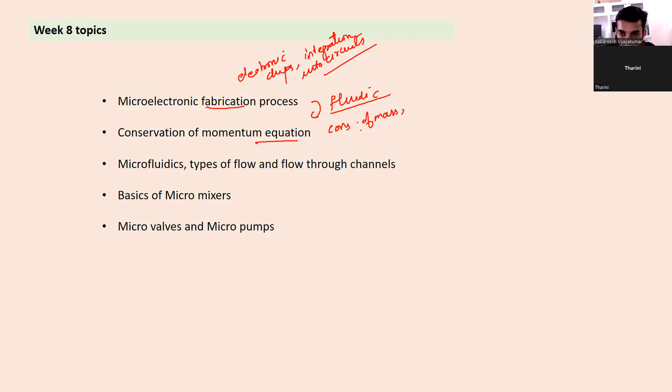Then comes the fluidic part, which was dealing with the conservation of momentum equation. As you may know, there are three essential equations: conservation of mass, conservation of momentum, and conservation of energy. These are the three fundamental conservation equations associated with any kind of system under consideration. So in the fluidic part, the conservation of momentum equation was discussed because that becomes the important part of the

weekly discussions. Then microfluidics, which involves the study of the flow through micro channels, meaning channels that are in micro level sizes. Then the different types of flow and the flow through channels. Then the different types of micro mixers, or the mixing of the fluids, was discussed. Then the concept of micro valves and micro pumps were also discussed. Okay.

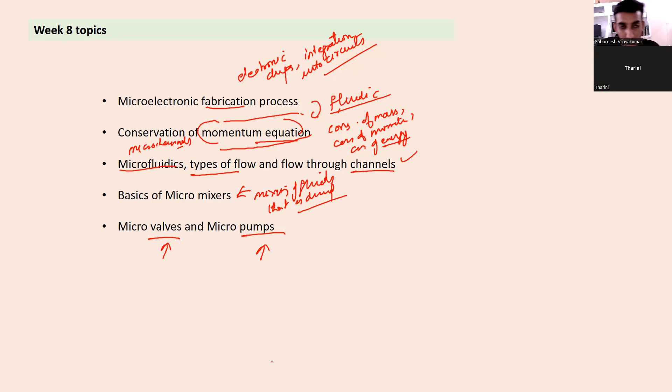So I hope you've gone through the weekly lectures, so that will provide a good understanding of the concepts. Micro mixers were one of the concepts discussed. So what are micro mixers? It's a microfluidic chip, with a set of micro channels etched into a material such as glass, silicon, or a polymer such as PDMS, polydimethylsiloxane, etc.

So a chip is etched into a substrate, a glass or a silicon base. The channels are created within that chip so as to enable the flow of the fluid, which involves the transport of the microfluid through that channel. So what we can do in microfluidic mixing is mixing of several types of fluid.

Suppose fluid 1 is coming and it needs to be mixed with fluid 2, and there is fluid 3. If fluid 1 is water, another may be alcohol or some medicinal fluid used in diagnostics. If all of them have to be mixed, we separately create channels to enable proper mixing, and the flow has to be very smooth and connected. So please understand that the connected feature should be enabled.

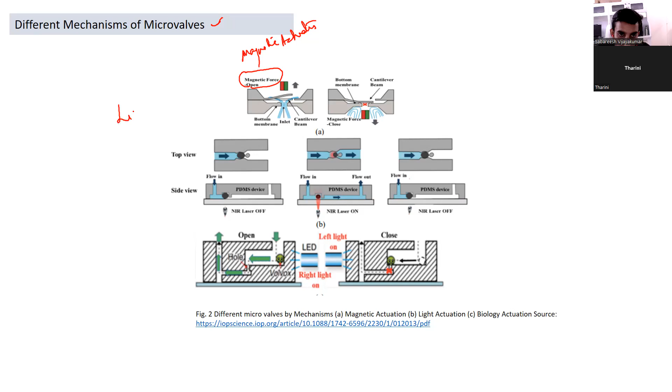So if the mechanisms of micro valves have been asked, we should understand that there are different types of mechanisms, but generally there will be 3 types. One is the magnetic force type, which is called magnetic actuation. Then the second type is light actuation. The third one is biology actuation. So you can see 3 figures here. So magnetic force is like the first one here.

So what happens? There is a cantilever beam, which means just a hanging beam. So this is the inlet through which the fluid enters. There is a bottom membrane here. So magnetic force is here. So as soon as it moves upward, it will lift the cantilever so that the fluid can enter and exit. Okay, so if the magnetic force is coming downwards, it can close the cantilever beam and the fluid entry is restricted. That's the first type. So this shows the top view of the magnetic type.

I'm sorry, this is for the light actuation type. So this is the top view and side view for the light actuation type. So you can see here there is a flow in. There is a PDMS device which is acting as a substrate. So you can see here there is a laser. What happens? This NIR laser, the infrared laser, as soon as it strikes this, the opening gets increased. The size of this gets changed and the flow can enter and exit through the space. So as soon as we switch off the laser, it comes to the initial position or the initial size.

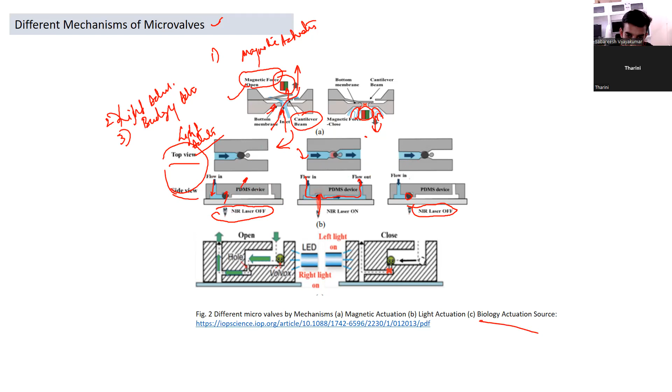The third type is the biology actuation source, which involves, you can see here, a worm or some kind of biologically activated body. So in the presence of an LED, when it is kept on the right side, that thing will be attracted to this space. So the flow can happen smoothly and exit through here. And on the other hand, if you are keeping it here, then it will come and hit the other side. So the flow will be restricted. So these are the general kinds of microvalve mechanisms.

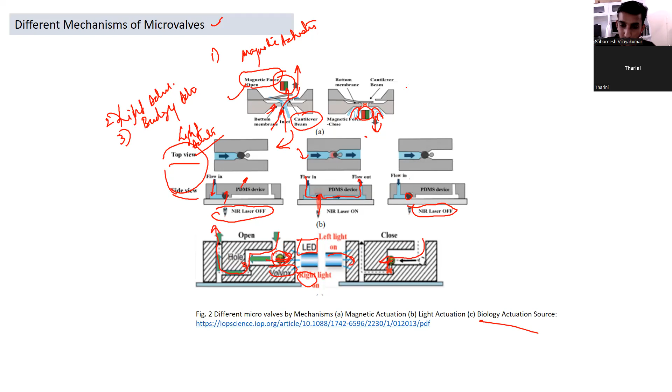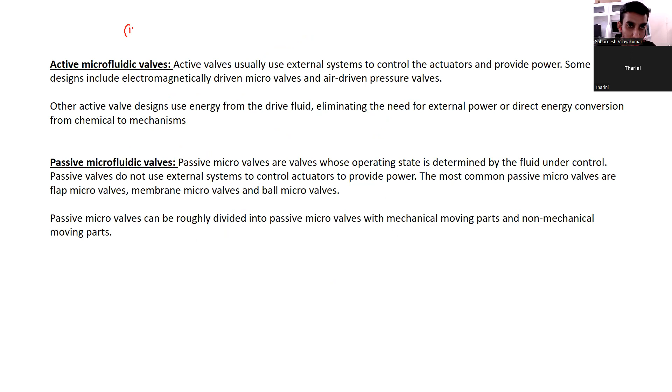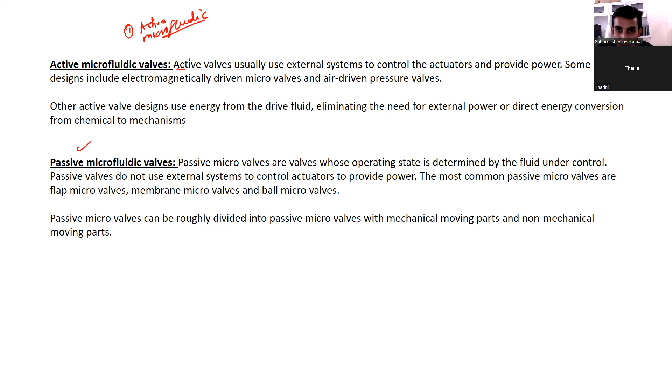So if we look at the microfluidic valves, there are two main types. One is active microfluidic. Then comes the passive. So these are the two main categories of microfluidic valves. So these active valves use external systems to control the actuators, which means that they require a power source.

So like in the case of that laser beam, it's a power source. So they need the power source to control the actuators and operate. So some of the recent designs include the electromagnetically driven microvalves that we have shown, then the air-driven pressure or pneumatic type.

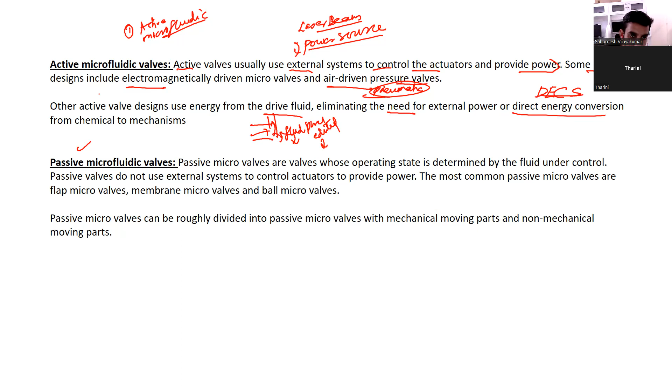So the processes happen from chemical to other mechanisms, like the energy conversion may be from chemical to mechanical type. So that is another category of active microfluidic valve. So understand that an active microfluidic valve requires a kind of energy to operate.

And in the case of passive microfluidic valves, their operating state is determined by the fluid under control. So they do not use any kind of external systems to provide power. Okay. They do not require any kind of actuators to provide power. The most common passive microvalves are flap microvalves, membrane microvalves, and ball microvalves.

Another one we know is the Tesla valve, a fluid flow regulating device. It's a very interesting structure. It just contains a design or arrangement inside a channel so that the flow can be regulated by the efficient design of the channel. So it does not require any power. It was invented by Nikola Tesla. So they regulate the microfluidic flow.

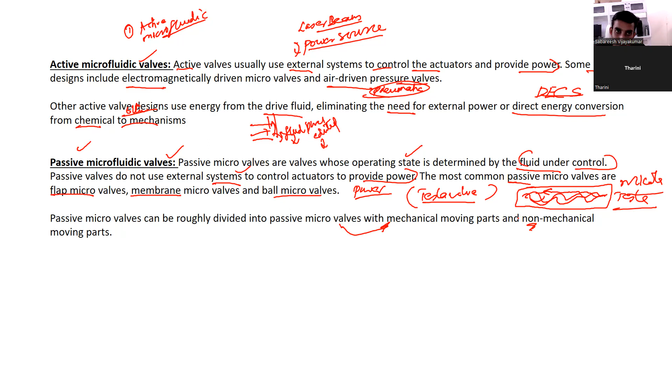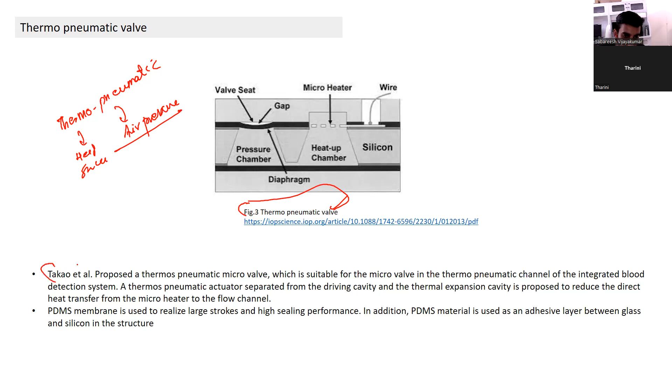Another kind of microfluidic valve which is of interest is the thermopneumatic type. Thermo means heat or heat source; pneumatic relates to air pressure. So this is the figure of a thermopneumatic valve, proposed by Takao et al., which is suitable for the microvalve in the thermopneumatic channel and directly used in the integrated blood detection system. Blood detection is related to the thermal effect of the flow. So this was invented by Takao et al. to determine such state.

The principle is a thermopneumatic actuator separated from the driving cavity, and the thermal expansion cavity is proposed to reduce the direct heat transfer from the micro heater to the flow channel. So this is separated from the main flow channel, from the mainstream flow. Okay. This is proposed to reduce the direct heat transfer into the flow channel.

You can see here there is a valve seat where the valve is regulated, and there is a gap formed. There is a micro heater, there is a wire. When electricity is supplied, it will heat, and this chamber will be heated up. There's a silicon substrate here. So there will be a difference in the air density.

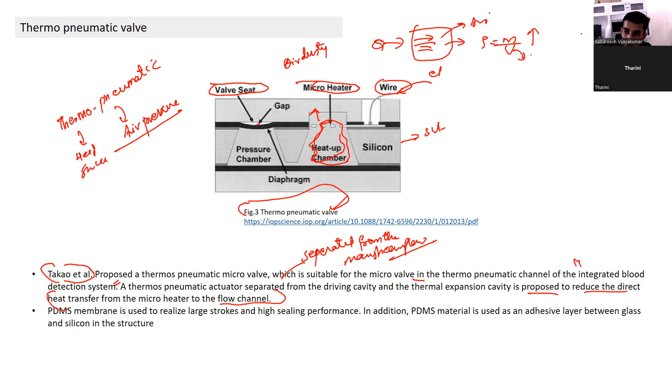Suppose heat is given to a chamber filled with air. As soon as it receives heat, the density, which is mass by volume, changes because the volume of the air inside the chamber is increasing. From the basics, we know that volume is proportional to temperature. As temperature increases, volume increases. So if you close the chamber, pressure will develop inside the chamber and the gas will exert pressure. It is like a piston arrangement.

If heat is given to the fluid, what will happen? The piston will start to move. This is from the first law of thermodynamics: heat given, dQ = dU + dW. When heat is given to a system, it is used in storing internal energy, and work will be done by the system.

If the system is closed and no work is done, all the heat is used up in increasing the internal energy. Internal energy is a function of temperature for an ideal gas. So when internal energy increases, the temperature of the fluid increases and the chamber starts to heat up. As temperature increases, volume increases. So the air will start to enter the pressure chamber, and it will press the valve seat and close it.

So if there is any flow happening, that will be restricted. And as soon as the electricity is switched off, the cooling of the fluid happens, and the pressure decreases, and the fluid or the air that is present will return back to the chamber. So gradually the membrane will come to the initial position and it will be in open state. So that's a simple understanding of a thermopneumatic valve.

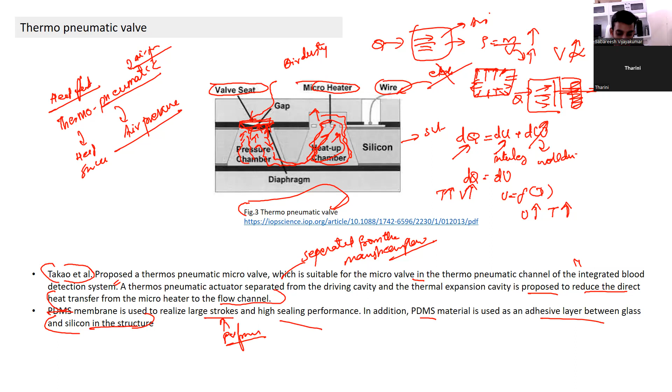Okay. So that's all the discussion, just a brief discussion of the week 8 lectures. So we will quickly move on to some of the questions. Which of the following is an example of an active microvalve? First one is electro-osmotic, electrostatic, piezoelectric, all of the above.

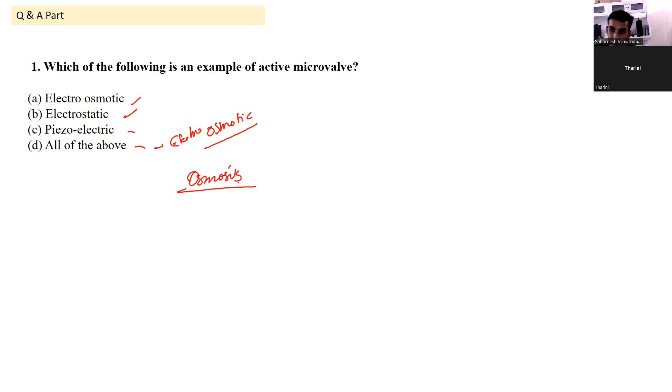Okay. So what is osmosis? Osmosis is actually the concentration driven flow, isn't it? So if I have the same kind of fluid, which contains the solute and the solvent particles, and they are separated by a semi-permeable membrane. What is a semi-permeable membrane? It will allow only specific particles, the solvent particles, to pass through the membrane.

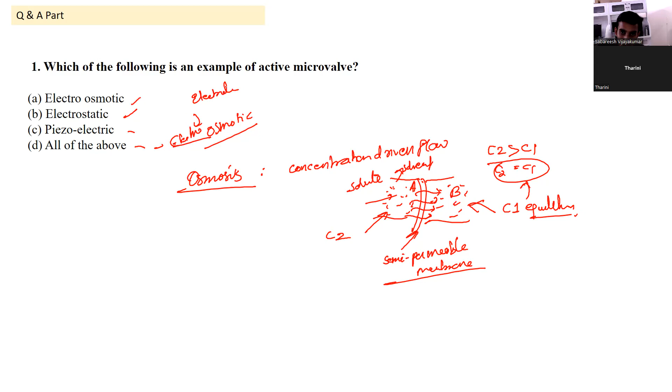So if this is side A and this is side B, and the concentration of the solute here is C2 and here is C1, and if C2 is greater than C1, flow will happen through the semi-permeable membrane until C2 becomes equal to C1. So that is the equilibrium point. So electro-osmotic means this will be stimulated by electricity. So it requires power. Active means it requires a power source, isn't it? Passive, no power. So electro-osmotic is an answer.

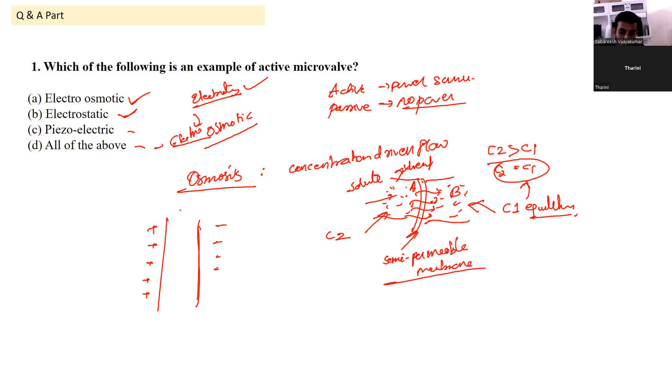Is electrostatic the case? Yes, electrostatic means we are providing electric charge to the plate or a capacitor. So this is acting as a microvalve, regulating the flow. We are providing electricity here also, so that specific particles will get attracted and the flow will be regulated. So electrostatic is also involving electricity. So it's an active source.

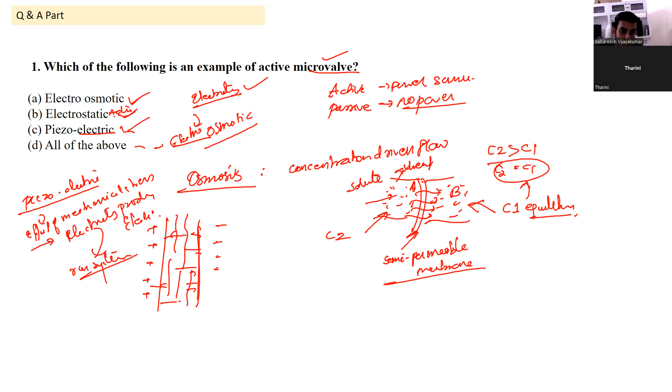Piezoelectric. Piezoelectric is the effect of mechanical stress which results in electricity production. And that electricity will be used to run the system, either to close or regulate any of the systems. Even in the previous case, if the heater is to be activated, we can generate the electricity by any of these sources. So that can also be an answer. So electro-osmotic is correct, electrostatic is correct, piezoelectric is correct. So the correct option is all of the above. Okay.

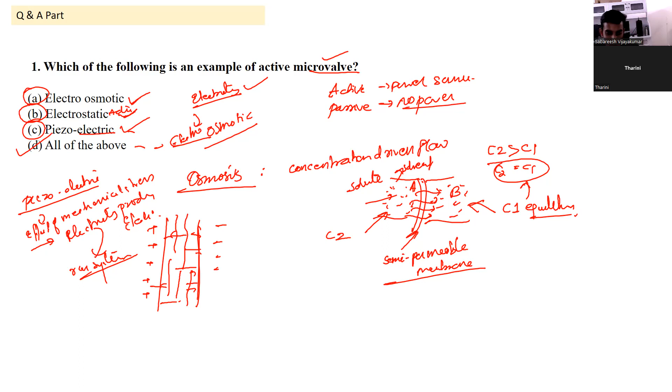Next question. It's a problem. A liquid enters a tube, and its diameter is 10 meters. I'll notate this to show the diameter. Okay. So diameter is 10 meters and the entering velocity is 20 meters per second. Density of the fluid is given as 100 kilogram per meter cube. The viscosity of the fluid is 20 kilogram per meter second.

Please check the unit. Is the unit correct? Yes. For dynamic viscosity, the unit is Newton second per meter square. Newton unit is kilogram meter per second square. Dividing by meter square gives kilogram per meter per second square, into second, so it becomes kilogram per meter second. So the unit is correct. Please keep in mind that it can also be written as kilogram per meter second.

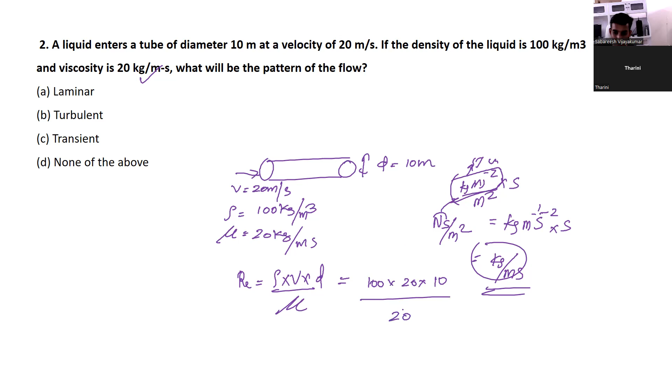So the question is, what will be the pattern of flow? Laminar, turbulent, transient, none of the above. To find the pattern of flow, we require the Reynolds number. Okay. So what is the Reynolds number? Reynolds number is rho into V into D by mu. Just substitute the values: 100 into 20 into 10 by mu. Ensure that all of them are in SI units. So the value is 1000. Reynolds number has no unit.

We know that if the Reynolds number is less than 2300 for a pipe, the flow is laminar. Our Re is 1000, which is less than 2300, so the answer is laminar. If Re is between 2300 and 4000, then it is in the transition zone. If Re is greater than 4000, it will be turbulent or chaotic flow. Okay, so the correct answer for this is laminar flow. I hope that is clear.

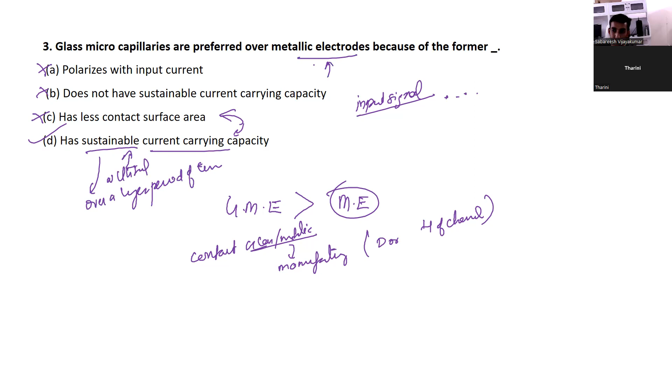It's not an advantage. So the only possible option is it has a high current carrying capacity. The glass can withstand and be sustainable over a longer period of time, while metallic electrodes may enter into charging or the polarizing effect. So that cannot be used. So the correct, best option is sustainable current carrying capacity. Okay.

Next question: the fluid will rise in a capillary when the capillary is placed in fluid if, first option, the adhesion force between molecules of the fluid and tube is less than the cohesion between the liquid molecules. Next option, the adhesion force is more than the cohesion between the liquid molecules. Third, the adhesion force is equal to the cohesion between the liquid molecules. And option D, none of the above.

Okay. So there is a capillary tube, and suppose if a liquid is placed, it will start to rise inside. We know that two forces are there: one is adhesive force, then cohesive force. Adhesive is between different; you can remember this as different. Cohesive means of the same type, meaning water molecule to water molecule. Adhesive may be water and glass surface. So it is asking, for capillarity to happen, which of the following should be there.

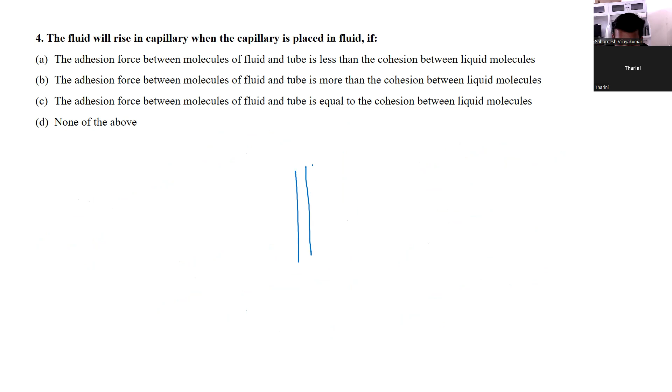suppose the height of the tube is L. So water can't rise like this infinitely and create a permanent fountain, isn't it? Suppose water is rising and again falling into the same bucket, and without any power a permanent fountain is created. That case is not happening. Why is that? Because of the surface tension force. So there is a limit up to which it can rise.

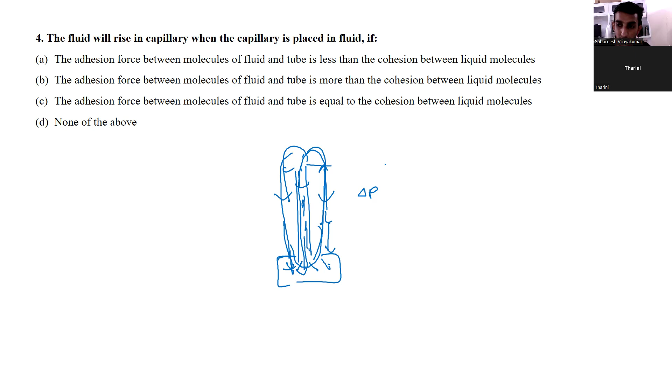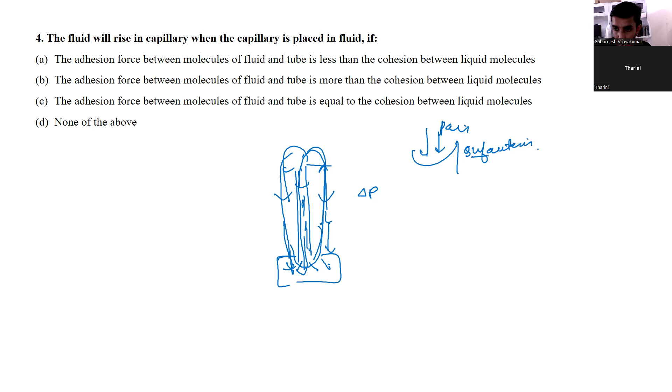Outside there will be air pressure. There will be surface tension force, which is created due to the cohesive forces. Then there will be the weight of the liquid. Balancing all this, we get the capillary rise to be 4 sigma cos theta by rho g d. So for a given diameter of the tube, there will be a particular capillary rise.

Theta is the angle of contact. If this is the meniscus of the water column, this will be the angle of contact which it makes with the glass surface. So that's the capillary rise. So our correct option for this question is: the adhesion force between the molecules of the fluid and tube is more than the cohesion between the liquid molecules.

So be careful when using adhesion and cohesion. To remember adhesion, think of our Fevistick or Fevikwik. It is written as adhesive, which means between the gum and the surface, so two different surfaces. Cohesion means with the same type. Okay, so the correct option is option B.

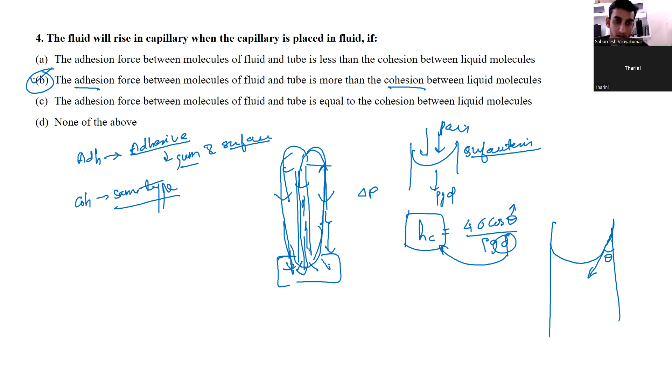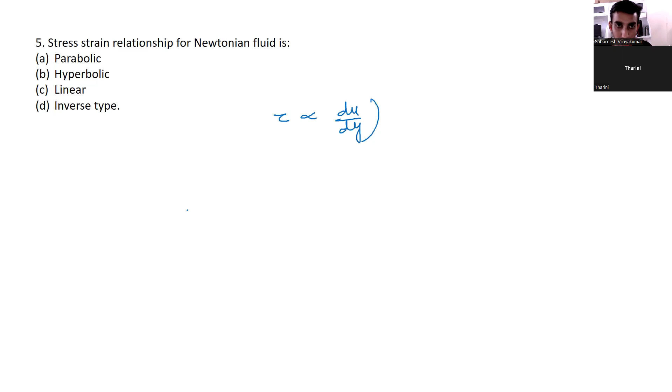Next question: the stress-strain relationship for a Newtonian fluid is parabolic, hyperbolic, linear, or inverse type. A Newtonian fluid is one where the shear stress is proportional to the shear strain. If we draw a diagram with shear strain du by dy here and shear stress here, we can write tau equals mu into du by dy. So that curve will be a linear type.

So the shear stress and the strain. This is the velocity gradient. With the velocity gradient, it will be a linear relationship. So what about the strain? What is strain? Strain is the change in length by original length, which is dimensionless. If we look at the unit of this, meter per second by meter, it is per second. So with the velocity gradient, it will be a linear curve.

What about the stress-strain relationship? The change in length by original length is the strain. So how can we determine that? If we look into the equations of deformation of a body from basic solid mechanics, we know that shear stress by shear strain, if we denote strain by gamma, is a constant called the shear modulus. So shear stress is gamma into G, where gamma is the shear strain.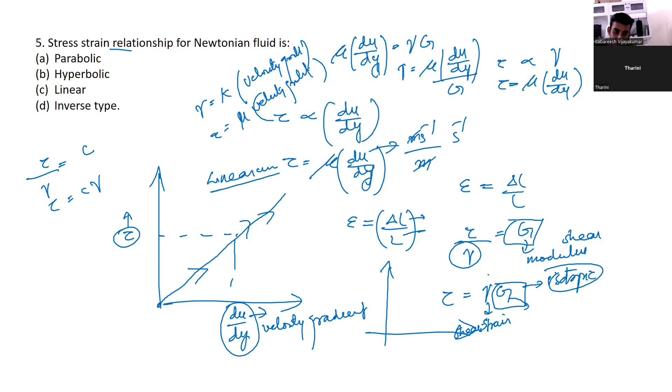So when we plot this, gamma is mu, another constant k, into the velocity gradient, and tau is mu into velocity gradient. If you divide tau by gamma, it will be a constant again. So that relationship will be linear. Understand that there is no information provided about G, the shear modulus. If the material is isotropic, this will remain constant. So we can take that to be linear. The correct option will be linear. I hope that is clear.

The understanding is tau is mu into du by dy, and the ratio of shear stress to shear strain is the modulus. If you assume that to be a shear modulus and compare them, the relationship will be a linear variation. Okay.

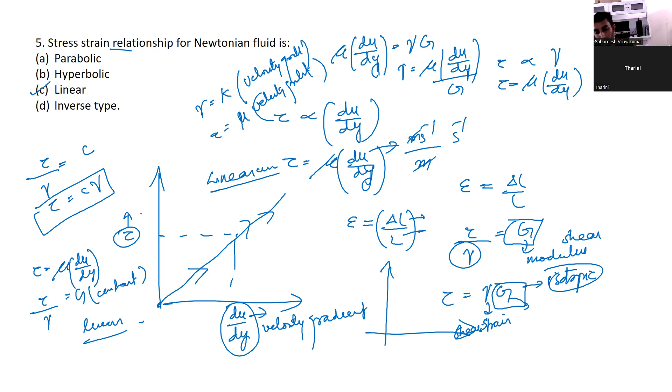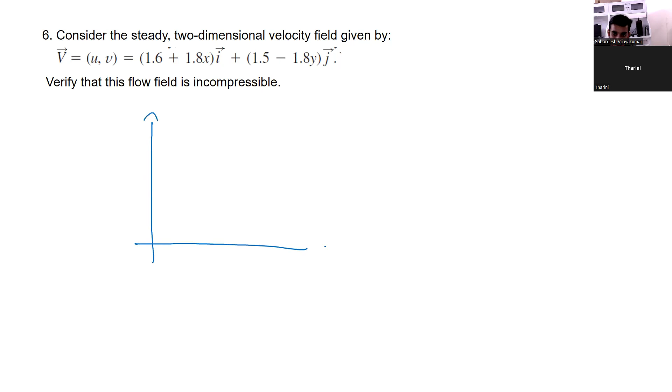Next question, it's a problem. Consider the steady two-dimensional velocity field given by V equal to (u, v), in terms of i and j. This can be represented like a vector with two components. This is the i cap, the velocity in the x component: u equals 1.6 plus 1.8x. And there is a y component, j cap: v equals 1.5 minus 1.8y.

So in an xy plane. So this is a two-dimensional flow case because there is no k component. So by the equation of continuity, we know that del dot u equal to 0 for what? For an incompressible 2D steady state flow. Okay, 2D is already given because we understand that this is a two-dimensional flow.

Del dot u equal to 0, which means u can be represented as in the question, ux i plus uy j. So del dot u means what? It is dou by dou x i cap plus dou by dou y j cap, the del operator, dot producting with ux i cap plus uy j cap. So just take the corresponding dot product. So what happens? Dou ux by dou x plus dou uy by dou y equal to 0. So this condition has to be satisfied.

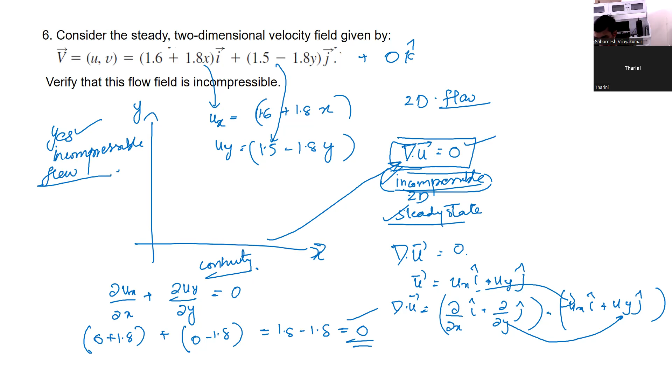Next question. Somewhat a detailed understanding of this flow through a channel with fluid. So first, let us read and understand the question. So the question is, two immiscible liquids. Immiscible means they do not mix with each other. So they are flowing steadily between two large parallel plates under the influence of an applied pressure. Suppose pressure is applied here. So this is the upper plate and this is the lower plate. Okay. So these liquids are flowing individually through a particular height.

Suppose if we take this point as origin and if we assume this height as say h, this height also as h. So we'll take it as minus h, assuming it to be in the negative direction. Because in the question also they have given this convention, minus 0.5, and the axis they have chosen, x-axis along this direction and y-axis along this direction. So this will be plus y and this will be minus y. Okay. So the lower plate is fixed. So it can't move. While the upper one is pulled with a constant velocity of 10 meter per second.

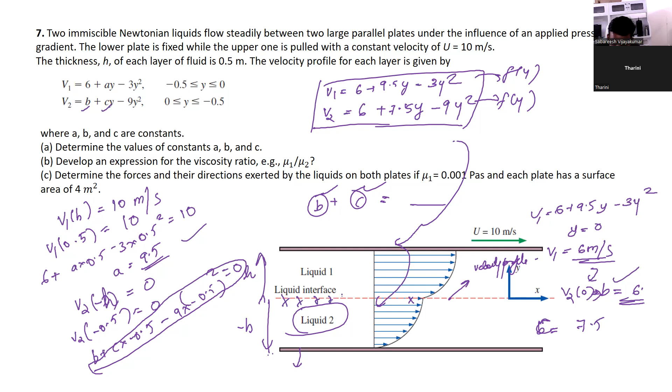We just need to determine the viscosity ratio, mu1 by mu2. For that, what can we use? At the interface, the shear stress from Newton's law of viscosity will be the same, which means along this line at any point. So tau1, which is equal to mu1 into dv1 by dy at y equal to 0, will be equal to mu2 into dv2 by dy at y equal to 0.

So mu1 into dv1 by dy will be 9.5 minus 6y at y equal to 0. We need to substitute y equal to 0. Then mu2 into 7.5 minus 18y at y equal to 0. That's why 0 needs to be substituted, which means that mu1 into 9.5 equals mu2 into 7.5. So the ratio mu1 by mu2 equals 7.5 by 9.5, approximately 0.79. So the viscosity ratio of liquid 1 to liquid 2 is nearly 0.79.

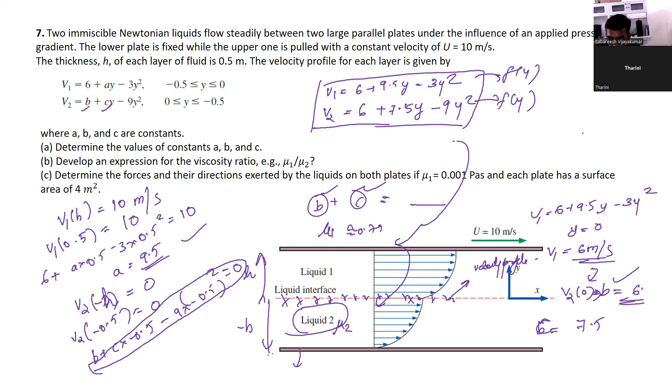So which... hello? Any doubt? Okay, I think Tarini, your audio... any doubt? Okay.

So we are getting the ratio of mu1 by mu2, which means that mu1 is less than mu2. So which is the more viscous liquid? Since this is the ratio of viscosity, we understand that mu1 is less than mu2, so liquid 2 is more viscous than liquid 1. So liquid 1 will be moving faster, or it will be less viscous. Okay. Now we need to determine, not the velocity ratio, the forces.

So we got the shear stress. Shear stress is force by area. So what is force? It is shear stress into area. Which means mu1 into dv1 by dy gives force 1 on the upper plate. So on the upper plate, what will be the shear stress? We need to substitute y equal to h. So for the upper plate, this is the value. So what is it for the lower plate?

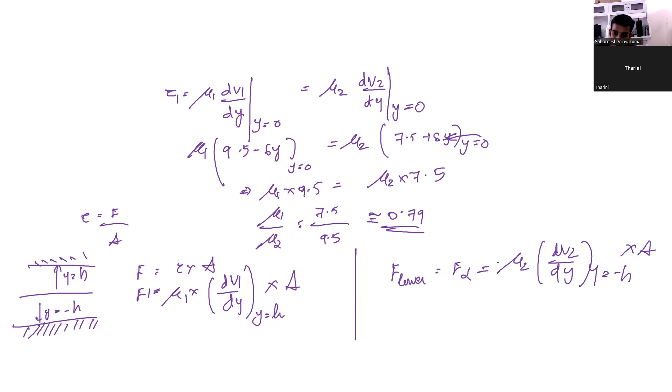What is the value? So into A is there. So it is y equal to minus h. So for the lower, which is F2, which is equal to mu2 into dv2/dy at y equal to minus h into A. So what is A? It is given in the question as each plate has a surface area of 4 meters square.

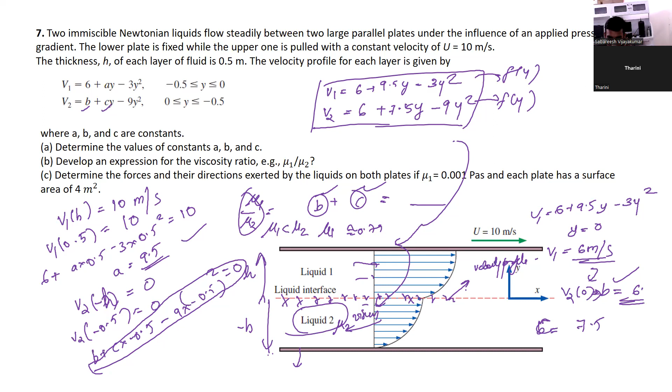So this is another application. So you can see here there is no mixing of the fluid. If the mixing of the fluid happens, then there will be variation in the viscosity and the profile will be different from here. The profile will be a kind of a mixed type. So that will make our analysis more complicated. This is actually given to be immiscible. So generally in the questions, it will be such kind of questions. I hope that is clear.